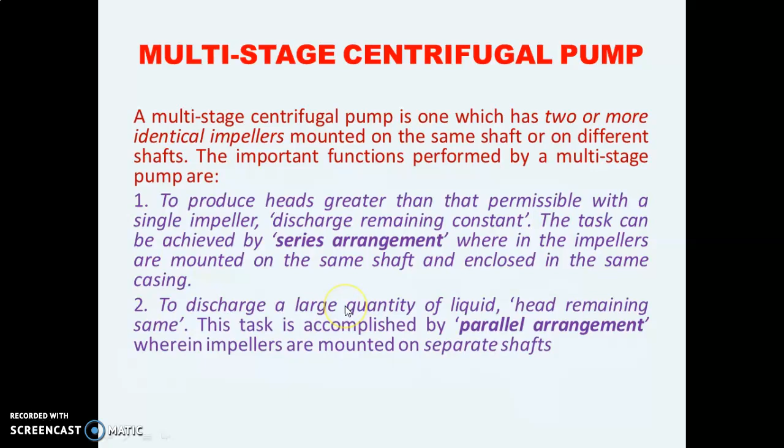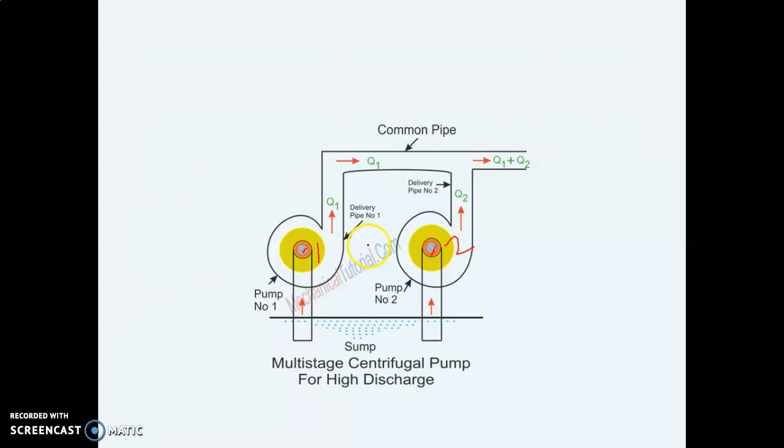So these are two different types: one is the series arrangement, the other is the parallel arrangement. This is the diagram of a multi-stage centrifugal pump in a parallel arrangement. These are two different shafts, this is shaft number 1, this is shaft number 2 at the center. Two different shafts are used, so this is shafts in parallel, and it is required for high discharge, as we have seen in the last slide.

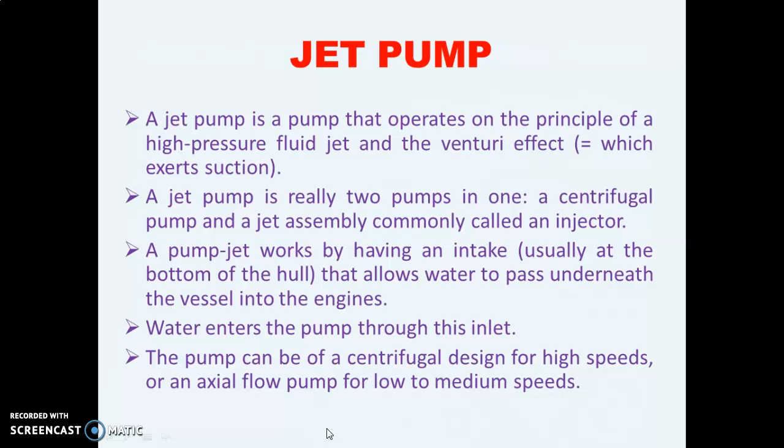Now the next pump is the jet pump. A jet pump is a pump that operates on the principle of a high pressure fluid jet and the Venturi effect. Instead of reading all these points, you can pause the video and read them later. I'll directly show on the diagram how the jet pump works.

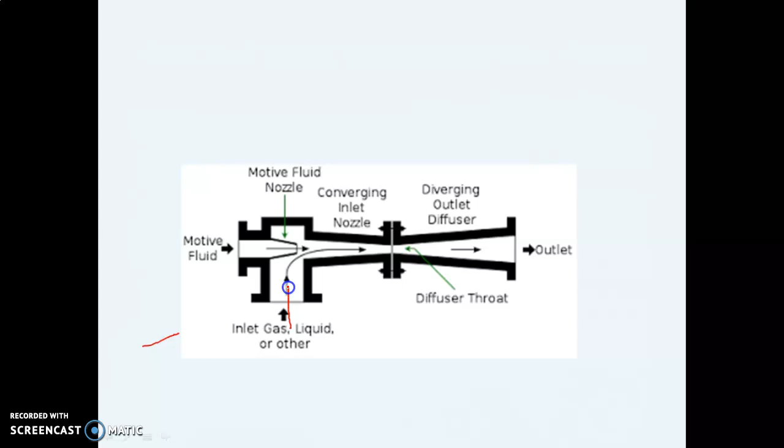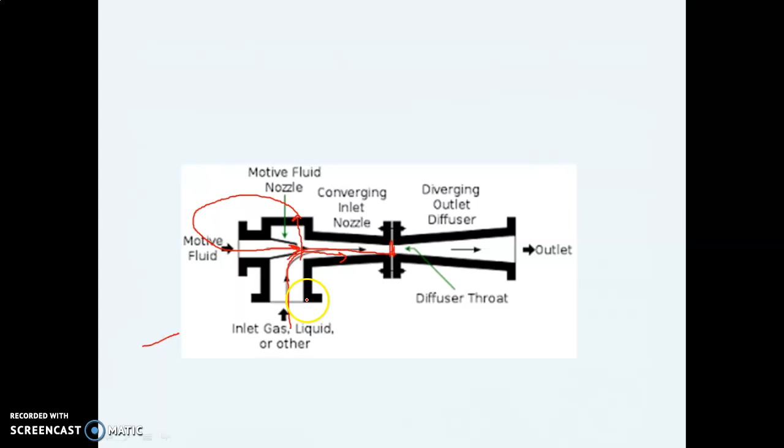Okay, so what happens is liquid enters this arrangement, some liquid enters here, some enters a pipe here which goes throughout and comes back again from this nozzle, and it strikes this venturimeter. Due to the high velocity area created, the pressure will be low, and due to the low pressure a vacuum will be created. Due to this vacuum, the liquid in this area will be sucked in and it will come out through the outlet. This is the working of a jet pump.

Next type of pump is the airlift pump. An airlift pump is a pump that has low suction and moderate discharge of liquid and entrained solids. What happens in an airlift pump is the compressed air mixes with the liquid, causing the air-water mixture to be less dense than the rest of the liquid around it, and therefore is displaced upwards through the discharge pipe by the surrounding liquid of higher density. You can read this sentence again and again by pausing the video.

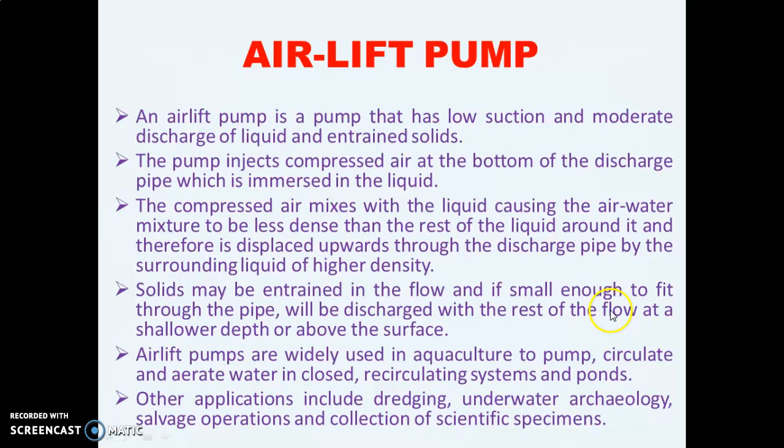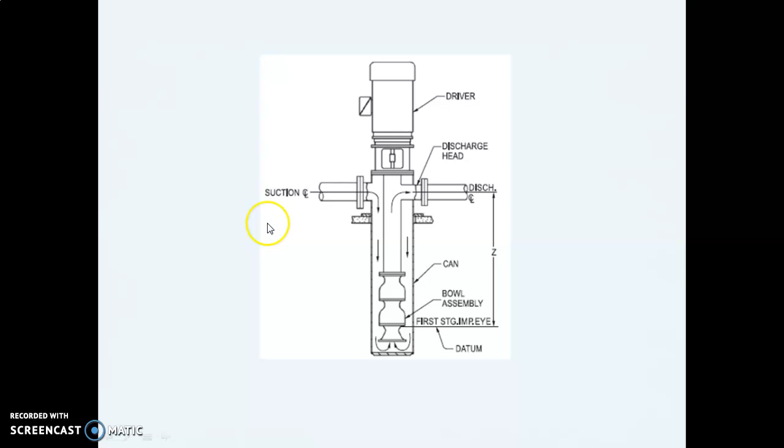Next and last we will see the submersible pump. A submersible pump is a device which has a sealed motor close coupled to the pump body. The whole assembly is submerged in the fluid to be pumped. Now this is a submersible pump. Its working is the same as that of a centrifugal pump.

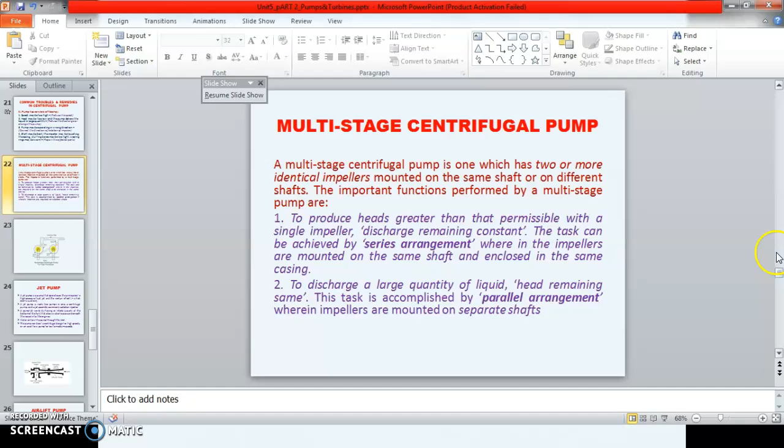But there is one main difference between a centrifugal pump and a submersible pump. In the centrifugal pump, the water was below the impellers, and this main body of the pump was out of the water. So the distance between the water and the eye of the impeller was pretty great, and this is known as the suction lift.

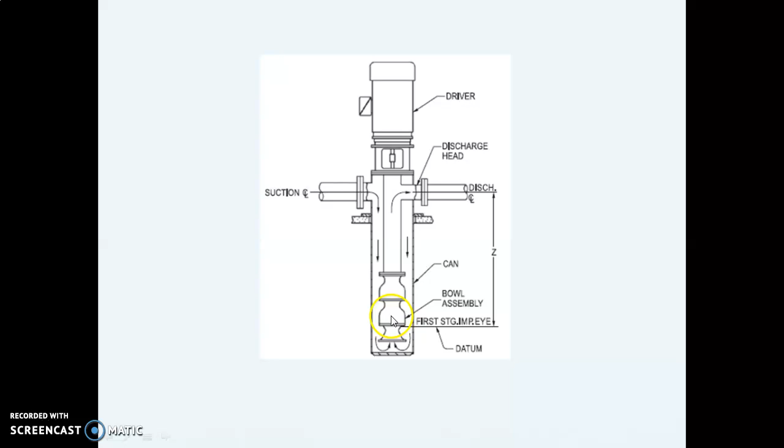But what happens in a submersible pump is the whole assembly is submerged in the fluid to be pumped. Now these are a number of impellers arranged in series over a single shaft. This whole assembly is inserted in the water, it is submerged in the water.

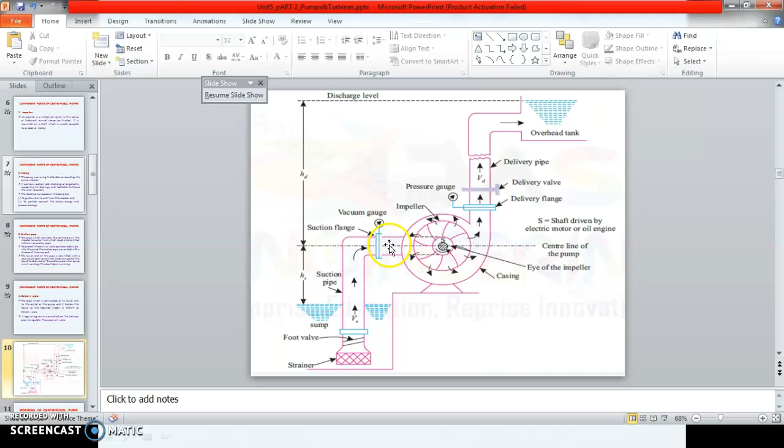So what happens is the main advantage of this type of pump is that it prevents pump cavitation, a problem associated with the high elevation difference between the pump and the fluid surface. In this case, as the impeller and water are far from each other, during the flow of water towards the impeller, there are losses due to cavitation.

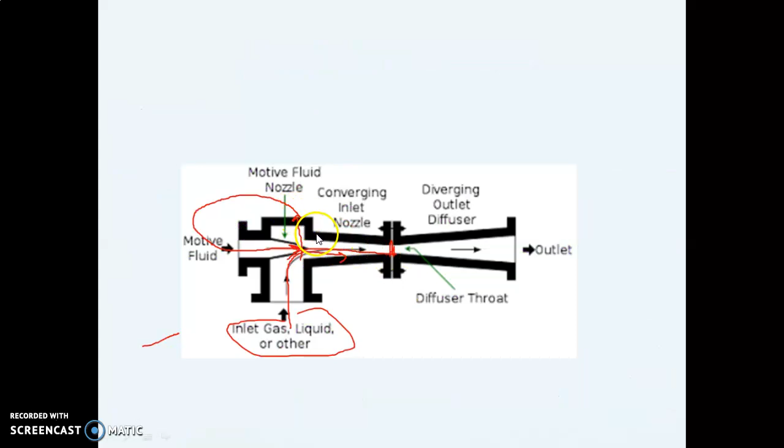But in the case of a submersible pump, as the impeller is inside the water itself, as it is submerged, there is no problem of pump cavitation. Submersible pumps are more efficient than jet pumps. Now, jet pump and airlift pump are examples of axial flow pumps, and centrifugal pump and submersible pump are examples of radial flow pumps.

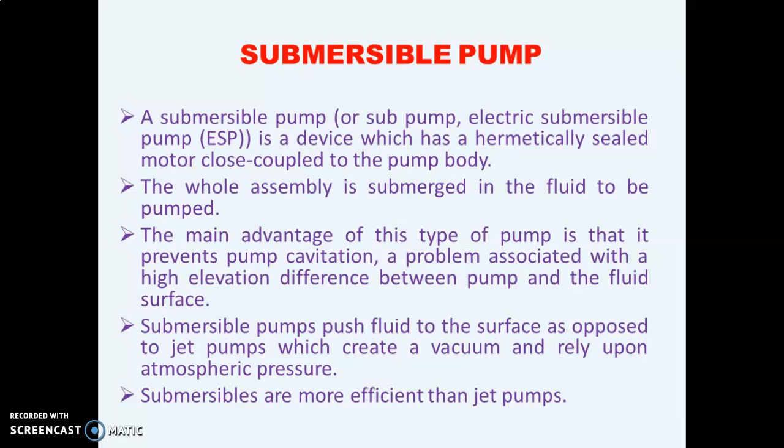So here we have finished the different types of pumps. In the next lecture we will calculate the power of a pump. Thank you.